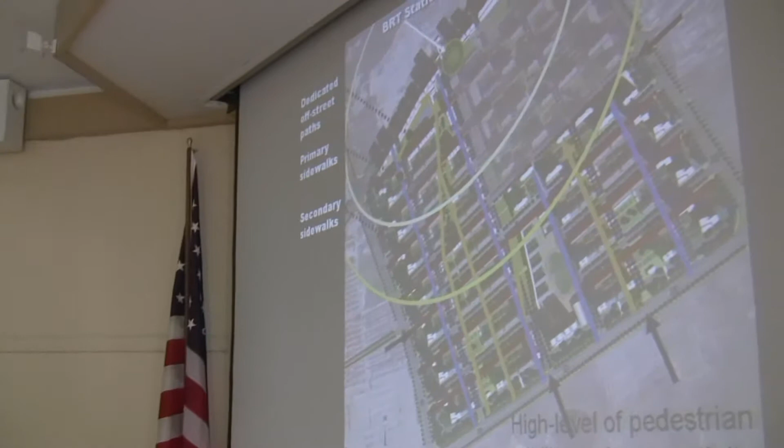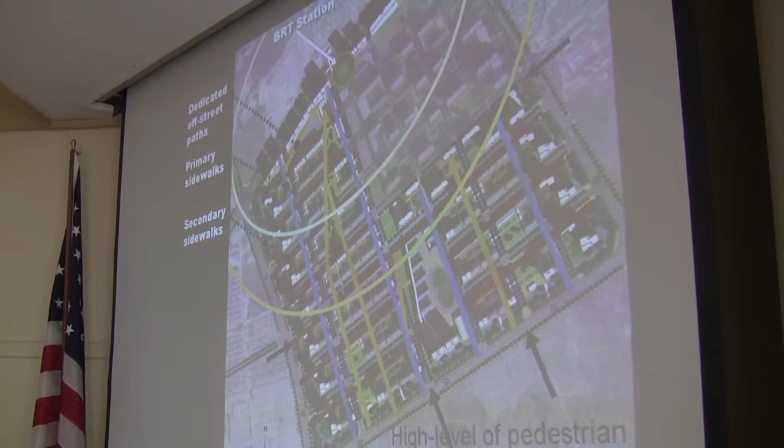The BRT has all the qualities of signal priority stations where you buy your ticket beforehand, 12-minute headways, all of that, right through the downtown. Let me go back—you can see the walking distances are really, really direct.

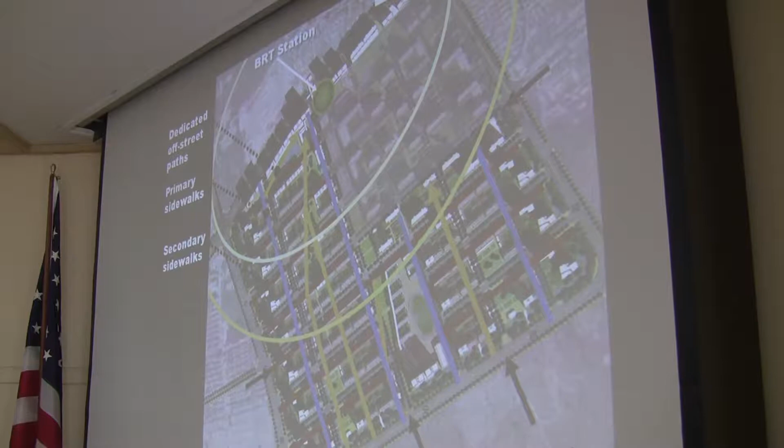We were interested: could you take this high density and make it resource self-sufficient? And the answer is yes. You do it this way: first, you make the buildings very efficient, and then you use wind and solar to provide the power.

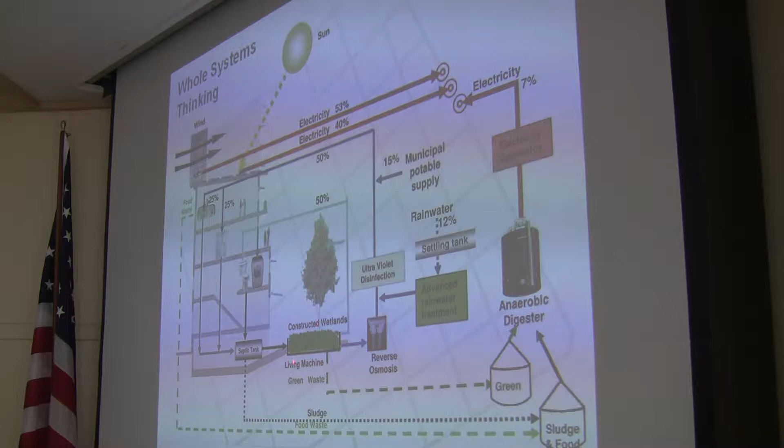But the key thing is the waste stream. You take the garbage from the kitchen, the sludge out of the sewage, and the green waste from the landscape, and you make biogas that makes up the electricity backup. So now you're using the garbage as an energy source, the sludge as an energy source, etc.

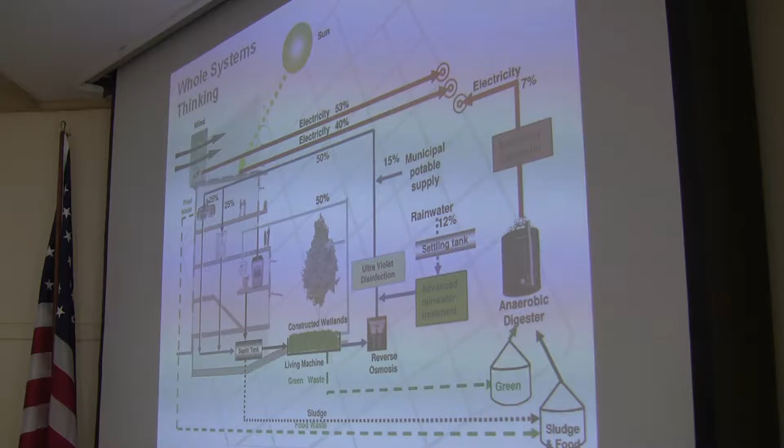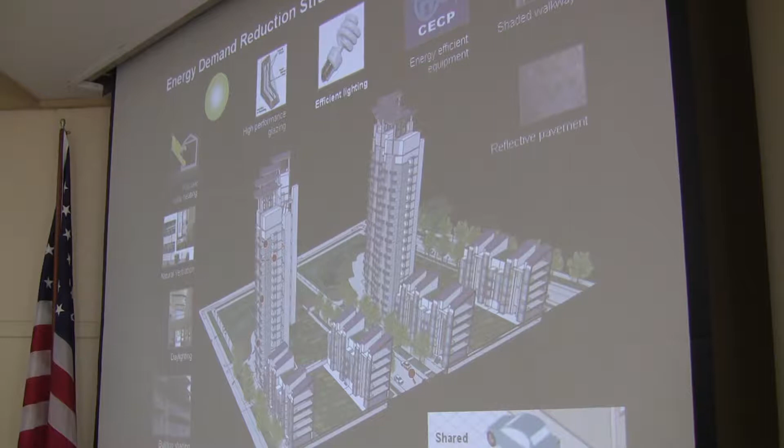You also have a combination of low-rise and high-rise. There's no one way to do this. You have to do shading, daylighting, natural ventilation, passive solar, good envelopes, efficient lighting, efficient equipment, etc.

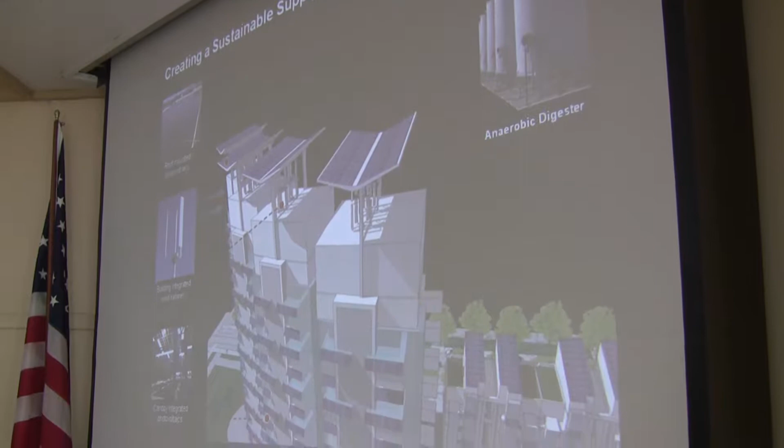And then you can use wind, solar, and biogas to power it. The key thing here is you save energy—you can cut down the load about 40% through all of these good building strategies.

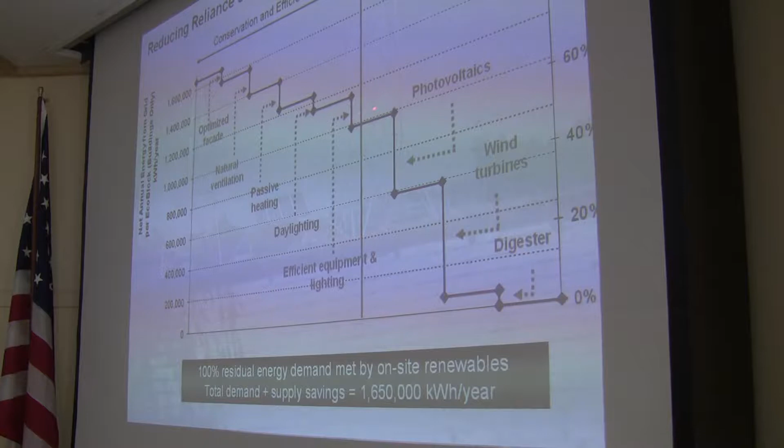That's why the buildings are important, but they don't get you there—they do 40 to 50%. And then you use renewables to do the rest.

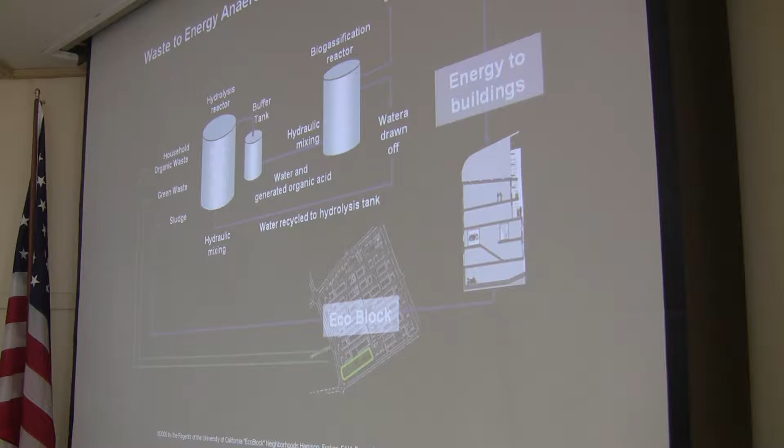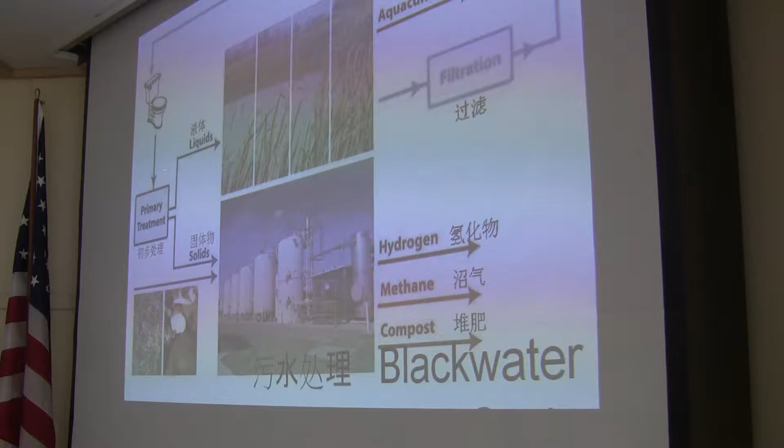This is a diagram of a system developed at UC Davis. It's a two-phase anaerobic digester. You take your solids and your liquids—the solids go to the digester here, and you get hydrogen and methane. Here you clean it in a wetland, and I'll show you how that works.

That's this living machine. You take the sludge out of the sewage, you take the effluent, you clean it here, and you can recycle it. Now why is that important here?

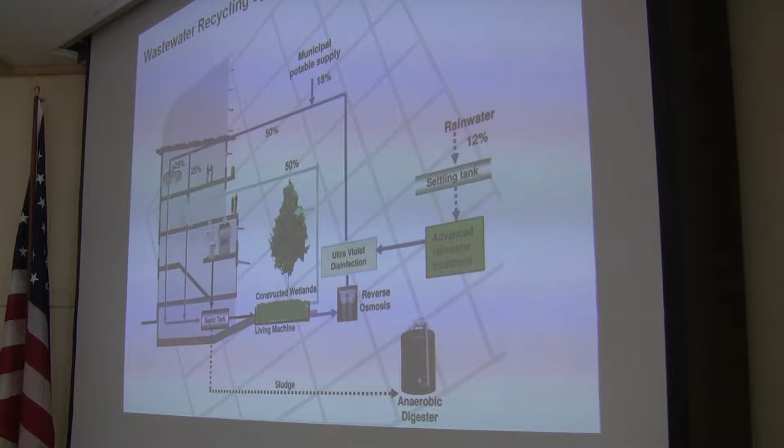You don't have to haul garbage away. But you now have water on the site—you're not using potable water for the landscape.

The biggest challenge San Jose and this whole valley is going to have, when the heat island effect gets worse and worse, is we're going to need more landscape to try to get the temperature down. And where the hell are we going to get the water? The best place to get it is from the waste.

So this is not about transportation now—it's about seeing this as a whole system. That's the first and most important new piece of information I want to put into this.

So how do you clean the water? You can use a living machine. There's one in the PUC building in San Francisco, and there's one down at Esalen.

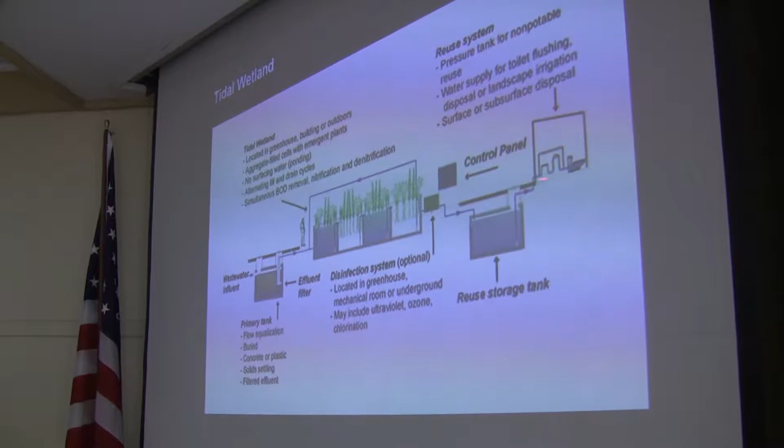You just cycle the effluent through—let's go back—through these tanks. It sits there, gets clean for a while, you pump it to the next one, and you measure the quality of the water there, and that's when you decide what you can use it for. The wonderful thing about this is they're gardens.

And because the water never gets above the surface, there's no smell, no mosquitoes.

So, let's go back. You can have it inside the building, you can have it in a garden, and if you have a freezing climate, you can put it in a greenhouse. It doesn't take up much area. You can do it in the city.

So we came up with this idea for Qingdao, and guess what? The developers were making so much money doing it the way they normally do that they said, this is a great idea, we'll do it later.

So I got a sabbatical and decided I'd try to find out if anybody else had done this around the world. I went on all the continents. I went to something like 16 different so-called sustainable communities, and I wrote about 4 of them in this book.

And it's a very elaborate story. Let me tell you quickly what it's about.

So these were the first generation efforts at integrated whole systems. You've heard that already. I used a very simple case study method, which was descriptive and analytic, and I analyzed these projects for their process and plan, the transportation, the urban form, green space, energy, water, waste, social agenda, in other words, of equity, etc.

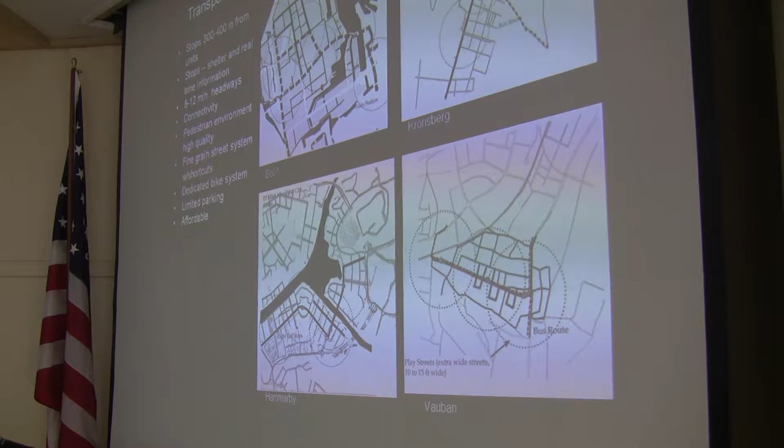The pedestrian environment was extremely high quality, very fine-grain street grid, dedicated bike system, and the most important thing is you could have shortcuts through the blocks. You didn't have to go on the streets. You could go through a gate, come through one block, and go out the other side. So it was a really pedestrian-rich environment.

I won't go through all the urban form, but basically the idea is they were all done around blocks, usually buildings on the perimeter with a courtyard in the middle. And it gives you an infinite variety of ways you can do things. And very high densities—we're talking about 100 units to the acre in this, which is a good density for cities. Same here, same here. This is a little lower.

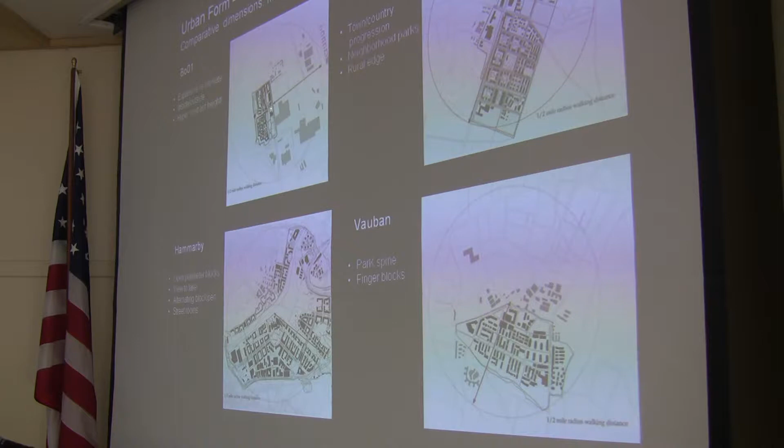So just to see the block types, now this is Bo01. Has anybody been to Bo01?

So what I like about Bo01 is you talk about the 4, 5, and 6-story buildings giving you a base density of maybe 60 to 100 units to the acre. Then you have this building, 350 units to the acre. And what's nice about it is you get a contrast. You get low-rise high density and high-rise high density working together.

Have you been to Shanghai? Can you imagine if there are 3,000 of these right next to each other? There's no privilege in living in that. So if you use high-rise, you want to do it carefully so you get the advantage of the view. And when you do low-rise, you want to make these wonderful inner courtyards, which is what these things are.

I'm not going to dwell on all these other ones. They just take fantastic advantage of the shoreline. This is Hammarby. All the units have views to the shore. This is the lake in the middle.

This has a progression of block types that are fairly high density along the transit line, all the way down to 1-story or 2-story passive houses along the edge of the landscape. So you get a real density progression.

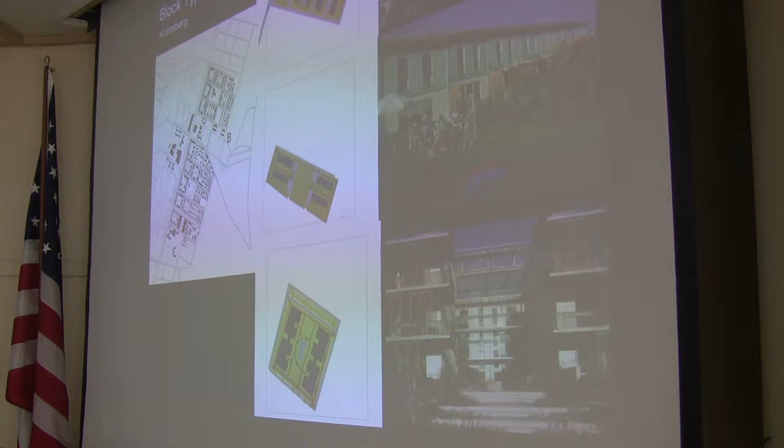Kronsberg has a really interesting place. This is the main street with a trolley down the middle. You can see the trolley line here. But they don't have buildings lining the street. They have the ends of the buildings coming to the street, and they have the commercial at the ends. So each end here is a store. So you have a commercial street right along here, but you get to see into the residential areas.

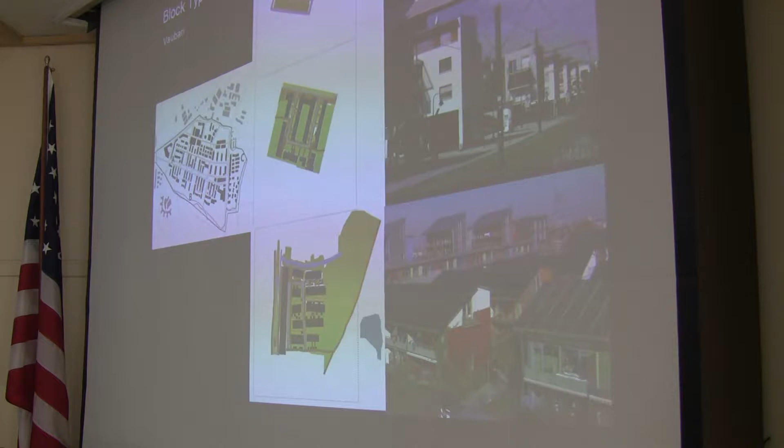And the result is an amazing green space experience, where you get all these fingers of green space. So these cities really pioneered in ramping up the green space to provide all sorts of services. And I'll get to that in a second.

Now, how many of you really want to know about the relationship with energy consumption? Let me dwell on this for a second. You may be interested. At the time, the standard in Sweden and Germany was about 220 kilowatt hours per meter squared per year for energy consumption. They set a goal of 105, all of them, which was cutting it in half.

In Bo01, they didn't attain that in the actual measured use. They went over it by 50%. The reason is they rushed to build this. The construction was lousy. They had too many windows facing west. It's a very windy site. But they had such a good system - they had a remote wind machine powering a heat pump that used the ocean and groundwater as a heat sink. So they got all of their energy from renewable sources, even though they went over on the standard.

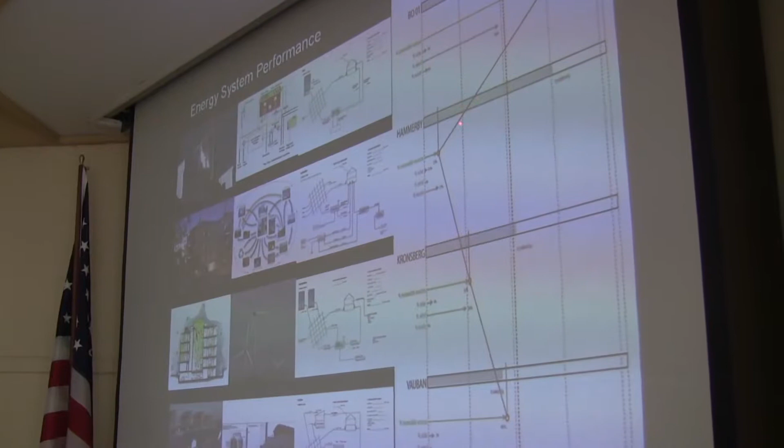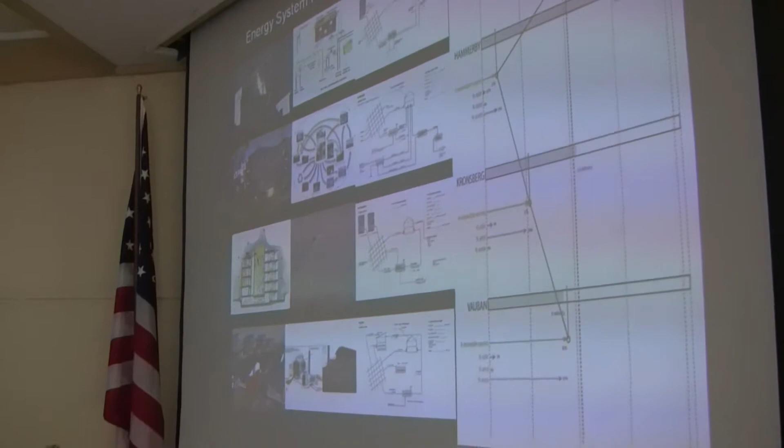Their original goal was to have the goal be down here and achieve it, but they got this much energy from waste, which is not a trivial amount - it's a little over 20%. And they got it by converting the garbage to gas, burning the combustible waste in a cogeneration plant, and actually taking the gas and using it for cooking and also for running their buses. So very inventive - the first system that really is doing this.

If you take Kronsberg, they had a cogeneration plant making electricity and heat, and they had 3 big windmills, and they did very well. They got right on the target, and they generated a little more than half of their energy from local resources, primarily wind. The rest was made up by natural gas.

What about these guys, Vauban? Bottom up, people did this. They set the guidelines, they knew how the systems worked. They beat the goal on average, which is here. And then they used a lot of solar, and they have a cogeneration plant powered by wood chips that makes the electricity and hot water. This part of the project generates 15% plus energy for the city. It's a passive house with PVs on the roof, very well insulated, 15% to the city. This is Germany now, it's got a winter - we're here in California.

So, fantastic lessons learned, right? So let me just keep going quickly. Stormwater: every single one of them collected the stormwater, retained it, cleaned it, and put it back in the environment on site. And they became design features throughout. Really inventive systems.

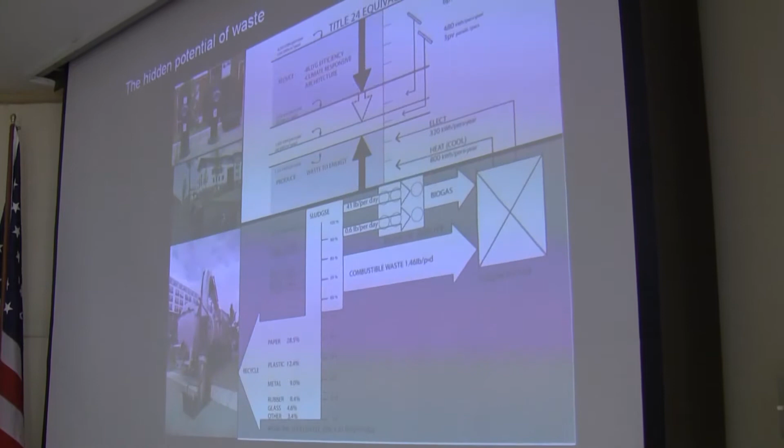So I did a little calculation on waste in the United States. So this is from the EPA, their standards. If you recycle glass, rubber, metal, plastics, and paper, which we do, we don't do a very good job of yard waste and wood that goes to landfill. We could combust that. If we take food waste and sludge, turn it to biogas, this can run a cogeneration, and it can feed so much heat and so much electricity to the load of a building.

This is a Title 24 building here in California, this current standard, right? If you use good architecture, climate responsive architecture and building efficiency, you can get down to about half that. So this is what we have to make up with renewables. It's easy. It's one solar collector per person for that. Just one. Easily integrated into the building or into the city. Very, very easily done.

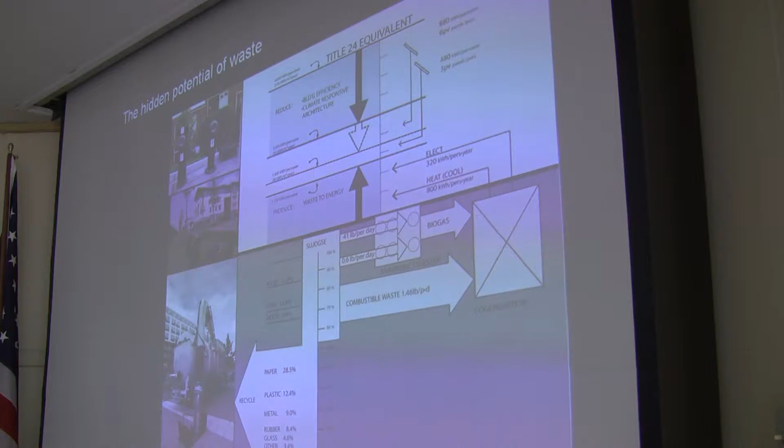He negotiated the deal with SunPower to buy the electricity, and he has an annual contract with the utility. So they have a net zero deal. Whenever they're making too much electricity, the utility takes it. Whenever they need a little bit, they get it back, but it's net zero. And he's charging, along with all the other apartment fees and so on, the utility bill as part of it. And he's making money. And they're going to be net zero energy, the first neighborhood in the US.

And it's all connected by bicycle paths. So they have very little parking, it's a student neighborhood. They were going to do the anaerobic digester as part of this, but they decided to use all the animal wastes from the campus and all the agricultural waste. They're making a much bigger plant, and they're going to put the gas and then use that to generate electricity and put it into the campus grid, not just to this neighborhood.

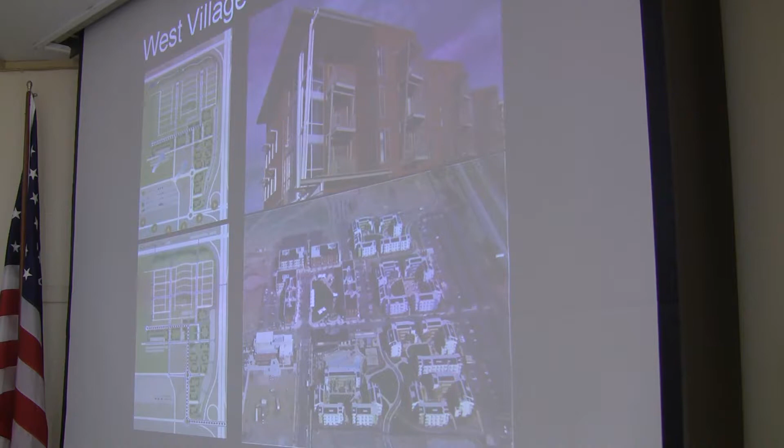Now, this is the first example in the US of doing this, and it's a developer who took the leadership here and is the agent creating the financing and the bridge to be a micro utility. So in some of your big projects, you can do that. I'm going to go really quickly. So this is really for architects, but I want to give it to you and see what you would do with this.

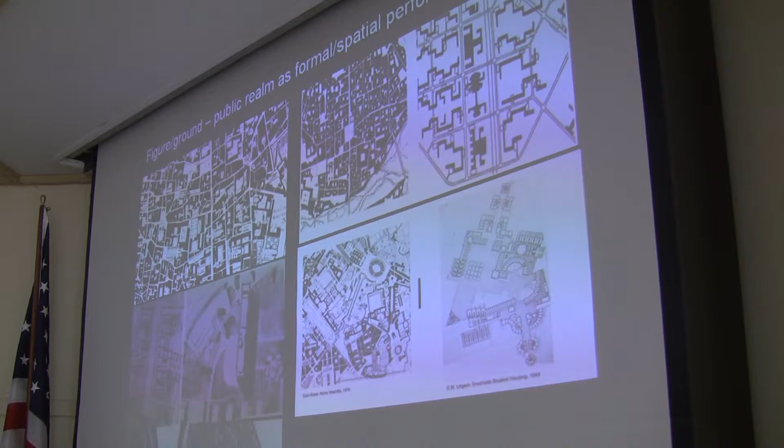So historically, architects have thought of the city as a spatial, formal experience. So they've just looked at the space, the length of the space, the shape of it, the scale, etc. There are a lot of people who look at the space in terms of its social performance. And lots of people have looked at trying to make the space for cities work nicely for transit, for cars, for people, really cared about the section, how you make it be multifunctional, multimodal.

But what about thinking of the public space in these terms? Look at this. What does the public space potentially provide? It can temper the microclimate, reduce the heat island effect. It can clean the air. It can absorb carbon. It can clean the stormwater. It can clean wastewater. It can grow food. It creates habitat. The biomass from this stuff creates energy.

And then these are the more traditional things. You know, very aesthetic, makes for a wonderful place. The health and well-being impacts of this are extraordinary. If you look at the medical people, they would say the natural environment is probably the most underappreciated healing experience you can have.

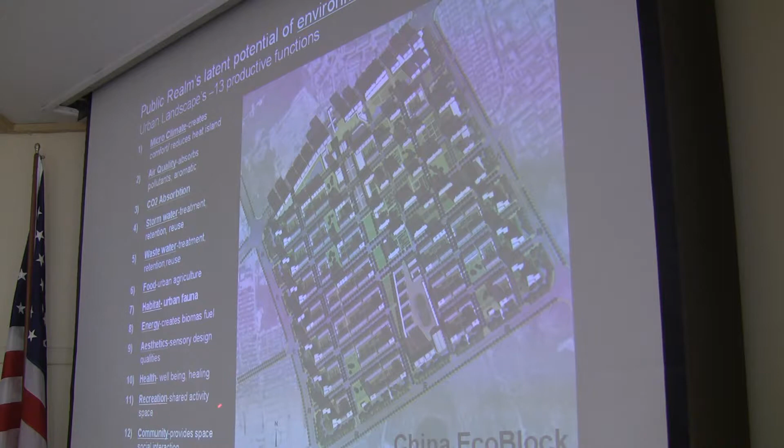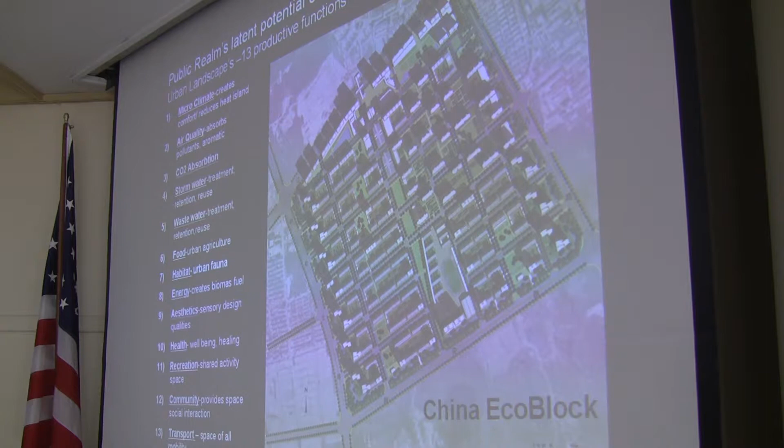Recreation, community space for social interaction, and then all the transportation, all forms of mobility. So, if you're a citizen or an architect, and you looked at a typical section of the city, where you have shops and some housing above, and public transit, and parking, and sidewalks, it's pretty much a hardscape, isn't it? Maybe there's some trees. Suppose you thought about this as a living place.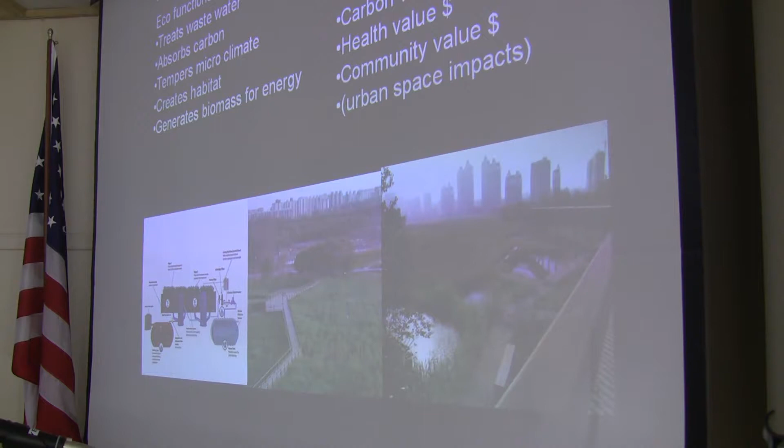So we are just starting to understand all the co-benefits that we can get if we engage that space, the public space, in terms of its environmental performance, not just its transportation, the traditional ways in which it's been used. So there it is. Now, why? Okay.

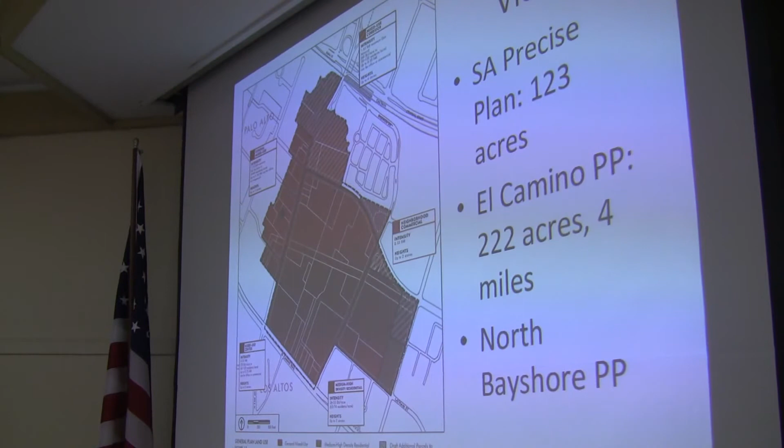El Camino Real is the highest transit ridership corridor for VTA's system, and VTA is currently planning for a bus rapid transit system along there all the way from Palo Alto to San Jose. So it presents an opportunity for TOD in the fullest extent.

And one of the other principles that Dr. Fraker talks about is having these pedestrian corridors, open spaces, densification, those kind of things. Those are all components of the San Antonio Precise Plan, as well as good urban design that they're thinking about right now.

Also, the city of San Jose, you have roughly 70 urban villages that the city is going to be embarking on planning over the next several years, and that presents a huge opportunity to look at some of these corridors, some of these areas, some of these spaces that Dr. Fraker talks about, that are perhaps underutilized, tired commercial centers and so forth.

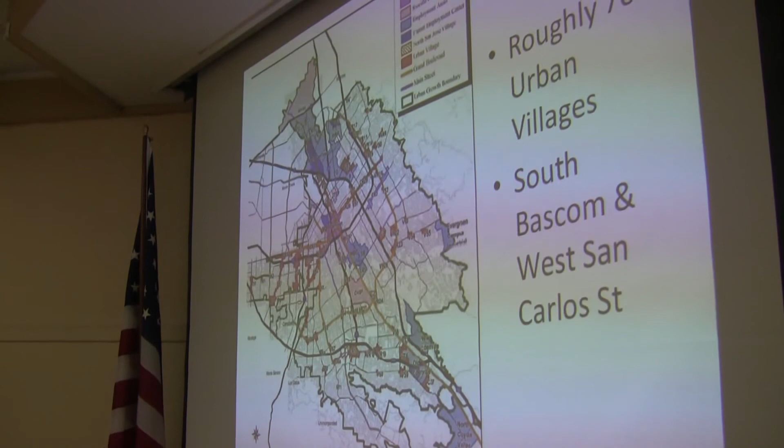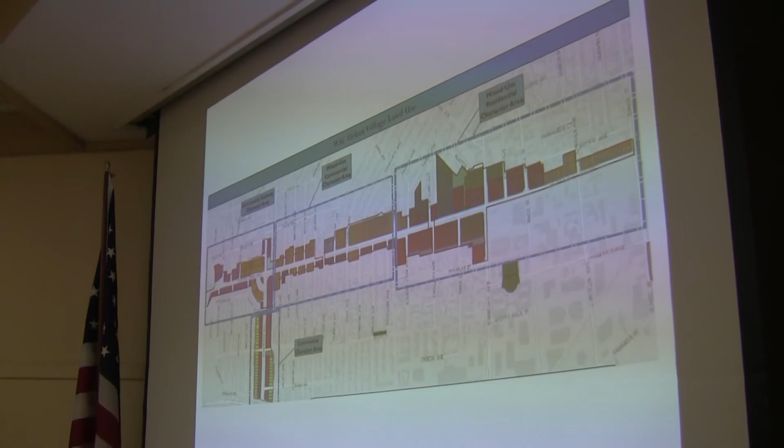So I'll give you one example. On South Bascom Avenue and West San Carlos Street, they're currently undergoing that urban village process right now, and the council is about to adopt those plans within the next week or so. And so this is the area, West San Carlos Street, South Bascom in San Jose. You can see that they're looking at various different uses, such as mixed-use residential character.

But what would a world look like if we incorporated separated bike lanes with landscaping? You can see there enhanced crosswalks. All of a sudden, it creates a much more walkable environment. You see the crosswalks there, and you start getting more and more people to walk and bike and use these zero-emission forms of transportation, right, that are also healthy for us.

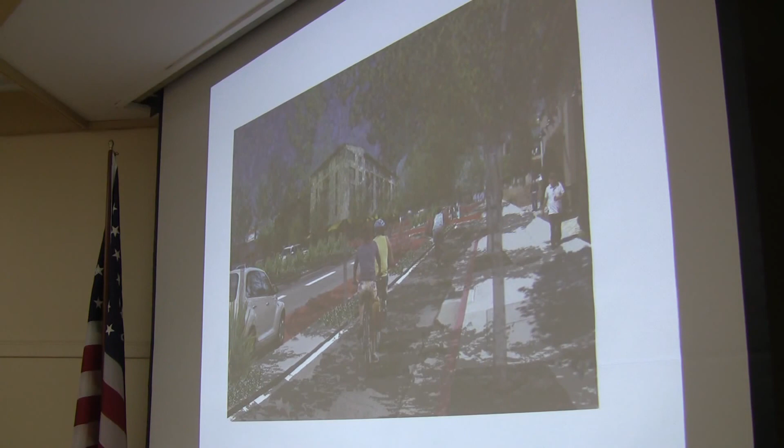You see this here is another example of what they're envisioning. And so these kinds of strategies are possible. There are cities that are looking at it, but we need advocates like yourselves to go out there and really push for these kinds of improvements.